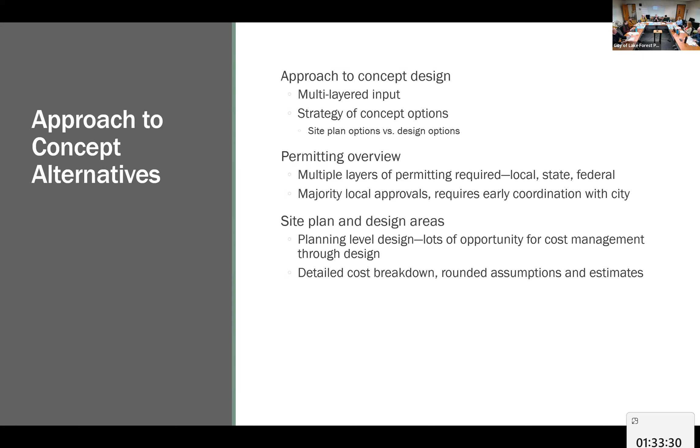So these are conservative costs. Just so you know, when you see them in there, don't think that that's what it necessarily will cost, but this is important information for us to make it to the next step.

Okay, so how do we price public projects? I have been to lots of public meetings where someone says, I built my dock for 20 grand over the course of a weekend. That might be true, but it's a different type of construction, a different process. I don't know if they got permits. They may not have.

And so when we talk about public place construction like this, a good way to look at it is relative to what else is around us. When we started this project, the council pointed out the recently constructed projects in Kenmore, Log Boom, and Tl'awh-ah-dees Park as being great assets for the community in our area. These are wonderful inspiration examples of what we would like to achieve in terms of the outcome of this project.

So we have kind of put those as brackets in terms of where our costs might come in as well. Obviously we have differences in area, differences in program. The amount of mitigation was a big driver in cost at Tl'awh-ah-dees Park - there's a huge amount of restoration, land forming, and earth moving that they did that really drove that cost. Then there's things like structures, bathrooms, utilities, all of those types of things that are different.

But what we tried to do is provide a breakdown of some recent projects. Those are all escalated to 2026, which is when we assume this project will go out to pricing. So today's dollars is one thing; when we put it out to a contractor to bid it, it will be future year.

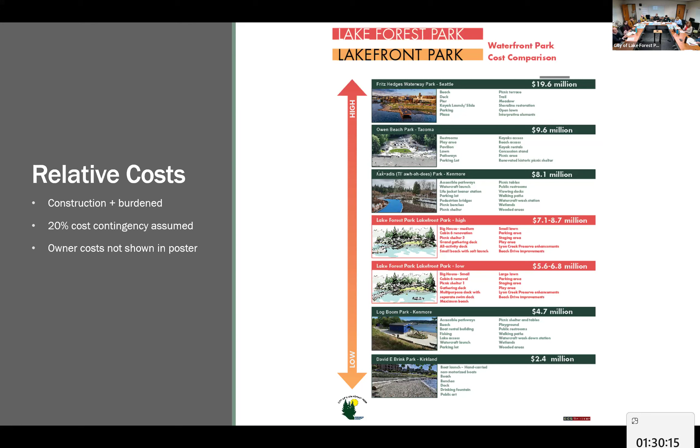Okay, got it. It is numbered page 7 in the cost packet, and it is page 40 in the PDF. Thank you, John.

I skimmed through the packet before, and I don't remember this, but maybe it's there. Is there something about what costs might be deferred? Like phasing, necessarily, where we're not going to do this now but we'll get to it later?

Yeah, so phasing the project is definitely a tool we can use to mitigate costs and divide cost over time. There are smart ways to phase, and there are ways that will actually increase the cost over time but allow you to do it in affordable chunks. So phasing is something we will explore when we get to preferred design, in terms of how these things can work together.

What could we do to build the park in a cost-effective way? The structure improvements may be one example—we could lock the structure and open it in year 3. Is that something that makes sense? Could we finish the park and then build the dock in year 5? If we did that, it would mean closing the park while that work happens, tearing up work we already did, or coming in by barge, which is a big cost increase. So there are definitely phasing paths we would look at.

Permitting, yes, and there are those types of things as well. So that's something we'll look at when moving into preferred design—how we can phase those things. Some of that phasing could also just be decisions that get postponed, or funding that we receive. If we receive 70% of the funding, what's the most efficient way to get as much work done, and then continue putting in smart, savvy funding applications for the next 30%?

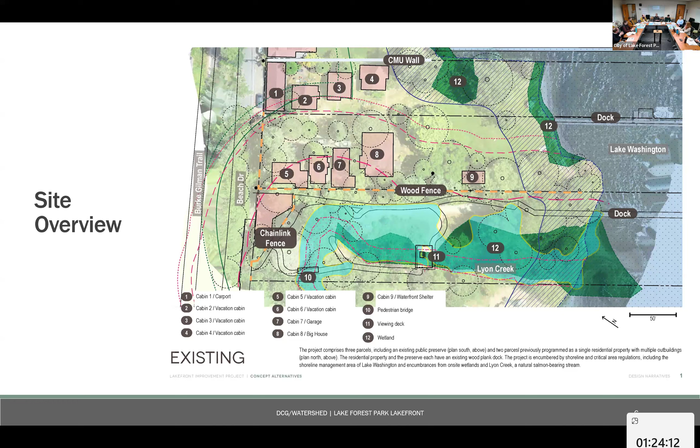So when we talk about mitigation, sometimes it really is for every square foot of development impact within any of these encumbered areas, we need to identify an equivalent square foot of restoration we can do. There's a chunk on page 6 of the packet if you need to reference that later.

So, planned demolition. Demolition and site preparation is a key part of this project. Some of that is because the funding we have, from the first series of RCO grants that the city got to purchase the property, necessitates that structures 1 through 4 be taken down. So those need to be demolished anyway.

There are 2 docks: the northern dock, which needs to be demolished, and the lower dock. Currently the dock on the preserve property crosses over a wetland associated with the mouth of Lyon Creek. It doesn't allow for water access because that's a specific prohibition of the conditions on the Lyon Creek property, and it's very close to the mouth of the creek itself.

So if we want to provide a dock that the community asked for, that people can recreate on, we'd basically be placing it close to the preserve dock, and then we'd have two docks, but that's twice as much maintenance and operational cost. We're starting to see issues with that dock too, in terms of tree encroachment and buckling of the boards, so it's going to need maintenance sooner than a new facility would.

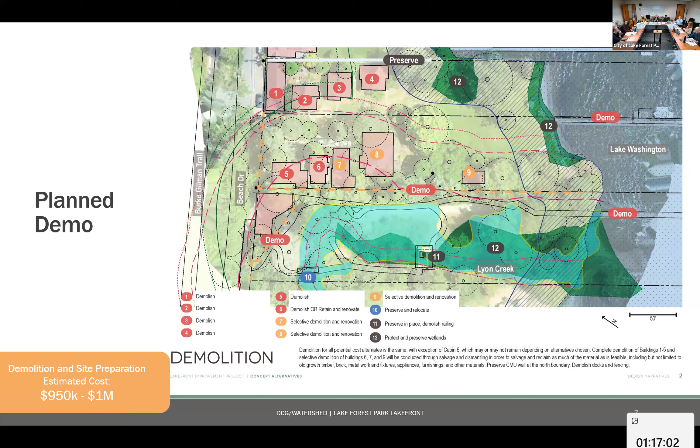Looking at providing a parking area, if we provide a loop that allows us to bring in school buses, allows emergency vehicles to turn around, allows for fire access, adding additional parking spaces means that we cannot keep cabin 6. So we can go with a smaller parking area and keep cabin 6, or go with a larger parking area and not keep cabin 6. That's one of those things we can iterate on.

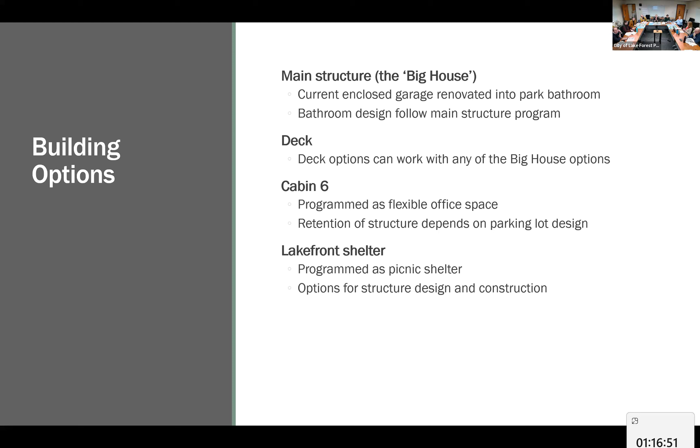And then the lakefront shelter, programmed as a picnic shelter, and we have some structure design options related to that one.

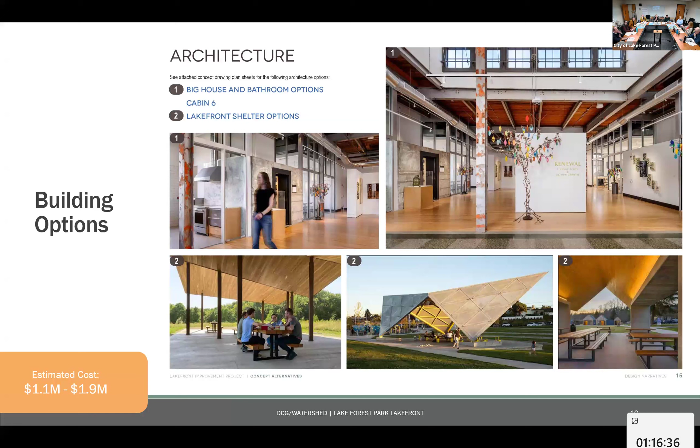For our building options, based on our cost pricing, we're in the $1 million to $2 million range, and that's for all of those things together: cabin 6, big house options, and structure options.

In terms of options for the big house, there's a small, medium, and large, and I've highlighted the areas where they change. Jack, do you want to present these? Sure. The small option is small in two ways.

You can see at the bottom of the sheet, what was the garage is now proposed as the public restroom - a 2-toilet, 2-stall restroom with 2 sinks. That's the smallest option for that.

The big house, the larger footprint up to the right, remains relatively un-demoed. There's a little utility room to the left with a door in it - we're keeping that in this instance. In the other two options it goes away, since it's not part of the original structure, not very usable, and makes the entrance narrow and a bit sad. So in the other two options we're removing it.

In this one, we're keeping it. The kitchen itself stays in the same general location as where it exists today - we'd put a new kitchen in, but essentially in the same area. We're also keeping a little bit of existing structure at the bottom of the kitchen, across the building to the other wall, in order to make spans smaller and hide new structure within those main walls. In the other options, that goes away.

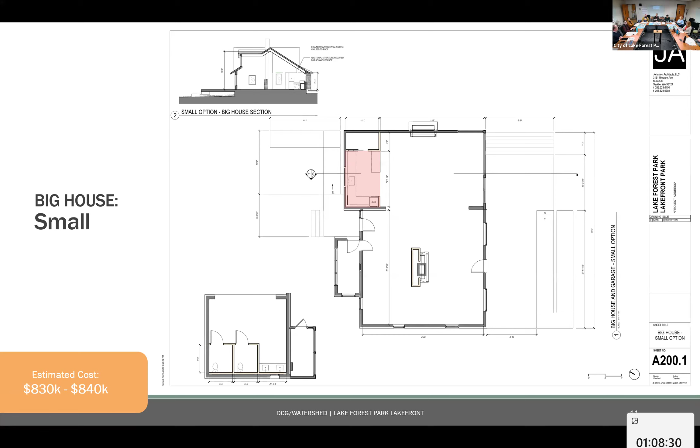I'm assuming it's the same brick that's on the face, because it does appear that way when you get a glimpse of it coming out of the roof. But currently we don't know that for sure. That's my guess. I'm going to skip us forward in the interest of time.

So the medium program, do you want to go? I can do it really quick. Awesome. So it's pretty much the same as the last one. I'll go through what's different.

We've changed the kitchen to the top to make it more of a single run. It gives more space to program, so it's still very usable, but gives more space to program. We put a little pantry back down to the south, to the bottom of the page.

And we do include in this version an accessible restroom within the house, so you don't have to leave the house to get to a restroom, which I think is really great for convenience and for accessibility.

Down where the garage was and where we're adding public restrooms, you can see that we've added 2 more toilets. So the 4 toilets is the max capacity you would be required to provide if we had an assembly use in the big house. So we're showing that as an option in the medium and the large option.

Outside of that, this is a nuance, but we'll talk about it a little bit in the cost estimate. We did a large roof, the dashed outline that leader is pointing to, so that you're covered going from the house to the restroom. What we didn't understand was that was actually pretty expensive, so the medium option is actually slightly more expensive than the large option, by about $12,000. There's a little bit more square footage of that roof in this option, which ended up negating the savings we were making on the interior.

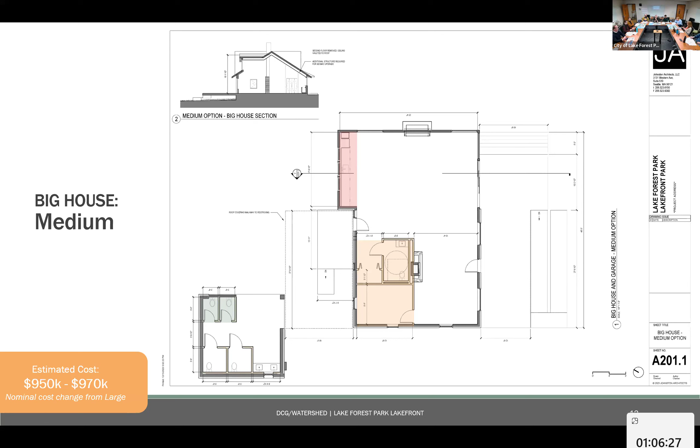And of the large assumption, understanding that we have a percent contingency of 20%, we're within that margin. So it is essentially a nominal cost change between the medium and large options based on that roof option.

So the decks are in separate slides, we'll go to the large house now. And just so all of you know, do all of these take down part of the garage structure?

Yes, so the garage is like a Franken structure. It's got the back, which is the old brick, and that's where some of the plumbing is, and then it's got the new wood garage front to it. So when you think about walking up to the center of the park, you've got the garage that kind of covers the beginning of the house. If we took that front part off and took it back to the brick part of the structure, it opens up that front where you start to see the front of the park, or the front of the house, as part of the entry visual of the park. So that's the intent here, a partial demo of the garage.

And would there still be slab? I'm wondering if there's usable space that can be turned into something, even if it's outdoor space.

Yes, so on your game board here, we basically have these two options that show the area where the big house can be programmed in any of those ways. You can see that the garage structure is pulled back, and we've essentially used that area to make an entry plaza for the park. So it all becomes one part of a sequence.

Okay, all right, and we can go to large just really quick, I can get through it very fast. The only thing that's really changed here, public restrooms are pretty much the same.

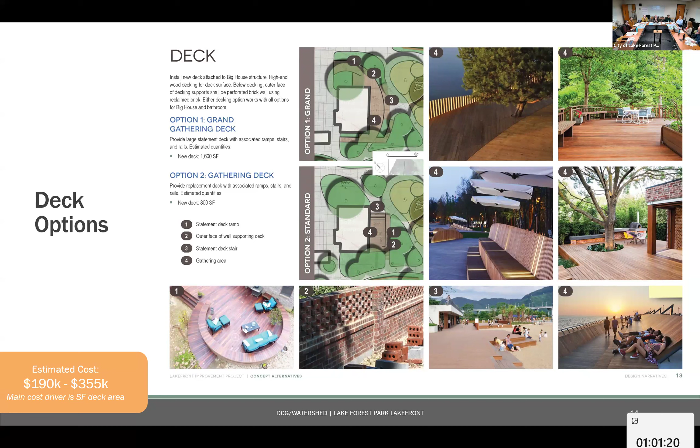So lots of options for things like, oop, that's wrong. Okay.

So we've got our deck with the grand program. This is looking at the deck area. We've got ramps. We are not through our grading exercises for this park, so these ramps may change, the incline might change. The stairs we imagine as a grand stair, but it does provide a sense of the difference we're talking about in size. You can see that comparative area to the house. This is nearly as large as the floor plan.

One thing a deck does for us also is help with stormwater drainage for this park. Stormwater engineering and drainage will have to treat everything, capture everything, all of that sort of stuff. Lyon Creek is a stormwater receiving body, and we are allowed to take our stormwater and drain it directly into the creek. But the ethos of this park and what we've heard from everyone is that they don't want that, that's not what the community seems like they would be jazzed about us doing.

So what we would propose is let's do better than what's expected in the regulation when it comes to stormwater. Capture what we can, treat what we can, and do that before ultimately cleaner water runs into the creek. One of the ways we can do that is through vaults, which are very expensive. They're either above ground and you're looking at them, or they're below ground and twice as expensive.

One thing the deck does for us is it allows us to have the visual of buried treatment without it actually being underground. It would just be under the deck structure. So this location would likely take the roof runoff from the structure, hold it in a little tank, settle it a bit, and then we'd look at dispersing cleaner water. It would be part of a larger stormwater program. It wouldn't solve all our problems, but it's one of those things the deck can help us do.

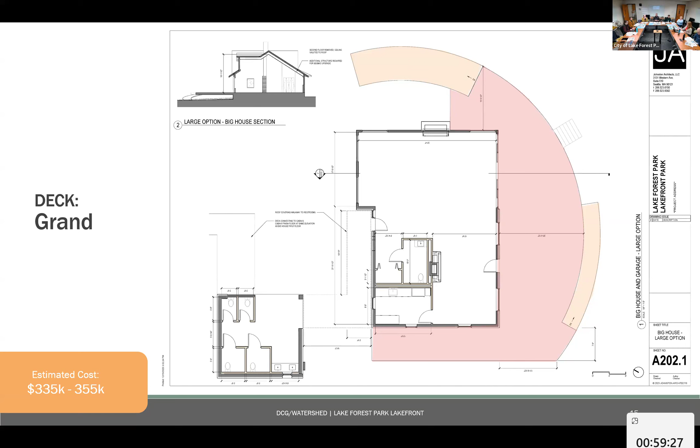So the modest deck program is much smaller, much more similar to the deck that is there currently, and it would of course have a ramp that would allow it to be accessible. So for cabin 6, essentially we looked at those options.

For the demo, what if we put parking? We can't keep cabin 6 in both of those scenarios. So these are your parking lot tiles - these are your two options here that show cabin 6 going.

In terms of what it makes sense to program cabin 6 as, opening it up as office space would provide another flexible, unprogrammed space that the city could choose to operate as they wanted. It could be overflow office space. A suggestion that came out was having maybe a community policing office there, so just providing a space that would not necessarily be open to the public.

Artisan residence was mentioned by the community members. It would be a flexible space that would add to that programming and community-based programming for the park, and it would really be a keep-it-or-don't-keep-it type of program. So there's basically one option for cabin 6, and it's it stays or it goes. If it stays, we wouldn't be able to do the maximum parking scenario.

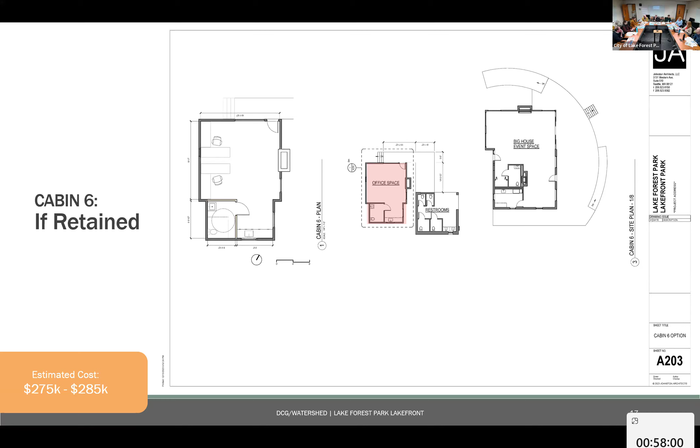So the lakefront shelter - again, we heard picnic pavilion. What we have here are a couple different design options that show some different examples, and then we have some costs of what cost implications a more complicated design has versus a more simple design. One thing to note about these is the footprint - we do have about the same footprint.

So here's the existing plan - about the same footprint, or a smaller footprint. And in this case, that reduction in area is one of the cost drivers, but this would also provide another option or opportunity for mitigation, to say we've given back 20 feet of this structure. So one thing to think about.

Jack, did you want to make any mention of these things? The only thing I would say is please don't get hung up on the aesthetics. I think if we chose the simple one, we could still do a folded roof, or we could add a wall or a chimney or something like that to the simple version. It's not necessarily the architecture driving those costs, it's more the size and what's inside of them.

Inside, in what way? Inside meaning, is there a wall, is there a chimney? I think we provided electrical outlets for pumping up your portable watercraft. I don't remember if we did anything for kayak storage in these - no, that's the other spot. Okay. The sink, outdoor shower - associated with these, so there's bits of program pieces that are also associated with these.

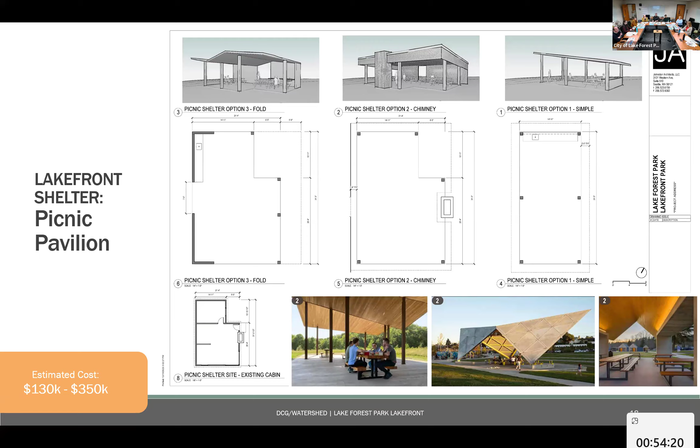Okay, so now we're going to hop into the design areas with single site plan concepts. So we've got the city hall to the Burke Gilman Trail. When we started this project, we knew there was an interest in providing parking in the city hall parking lot and safe pedestrian connections between city hall and here, which is where the current Lyon Creek Preserve parking spaces are. So we looked at that condition and provided recommendations to the city.

We heard a lot from the residents on Beach Drive. We heard a lot from the community about where they felt safe in the approach to the park. You remember the exercise with the dots. There are improvements to be made.

And we can either decide that those are project costs, in which case we would be on the timeline of the Sound Transit projects and WSDOT. So that means that if we're saying whatever they do with Sound Transit, we're going to come in and redo this intersection, we're talking many, many millions of dollars and a very long process to get that happening.

So the decision was made that the design team, led by Jeff and Kirk's team, provided recommendations on what could be done to reestablish the U-turn at the intersection, which would keep people from U-turning onto Beach Drive, to maybe widen the crosswalk, to widen the path approach. We also worked on what the future of that area adjacent to City Hall, where the designated turn lanes are, is going to look like according to the Sound Transit plans, and how we would iterate on that. So how can we say, hey, you're going this far, why don't we just do this other thing, and have that be part of it?

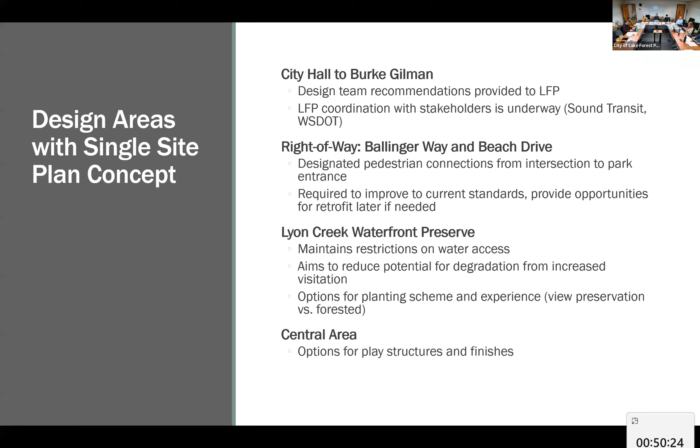And then the last is the central area. This is the area that connects everything, kind of between everything. There's options for play structures, finishes, that sort of thing that we can discuss when we get to that.

Just a time check, we're at 8:10. Okay, perfect, a little timer ticking away there at the bottom. 50 minutes left of this meeting.

Okay, so here's the recommendations that we provided to the city. Jeff, do you want to give a 30-second, 2-minute, or do you want me to go over them and then you can be expert question answer? No, you could go for it, Amber. Okay, that sounds great. All right, oh, two Jeffs, okay.

So essentially, we've got the journey to the park, starting with our front door to the park experience, starting with those existing spaces for the preserve, so the dedicated few that are there. Currently it's a pretty narrow sidewalk, and it basically puts you out in this area, kind of coming on at the side of that lane.

With the reconfiguration, the addition of the stop, the proposed plans, not the final plans for Sound Transit, but the improvements they're making, that becomes a narrow sidewalk that doesn't line up with the program. So the recommendation we made was to widen that into a path, a 10-foot wide path that leaves the parking area and comes down a little closer to the corner where the new curb ramp will be, so it's a nice wide crossing across that lane, again a wider path.

So if you're imagining a group, a family, pool equipment, that sort of stuff coming across this way, we wanted to provide as much refuge space here as was feasible, while still keeping the tree and those types of things, and still working within the proposed plan that Sound Transit is committed to making in terms of their improvements, based on them being not completely done.

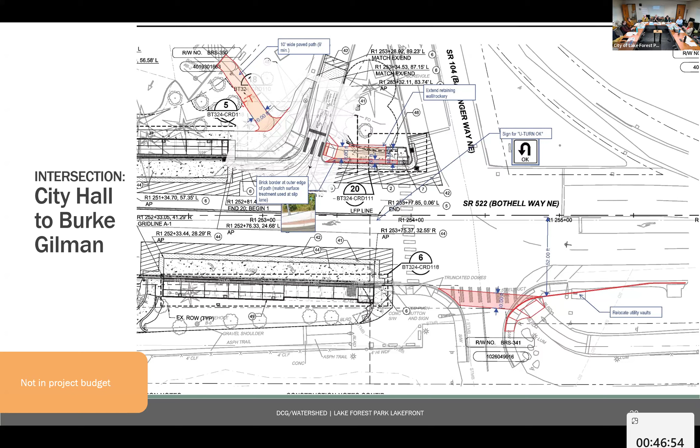So it's something that, again, not in the project budget, moving on its own course, coordination between Sound Transit—and this is actually in and adjacent to the King County right of way. So there's a handful of other interests looking at this, but it is moving ahead, though it won't be represented in the project cost or the presentation to the community, essentially.

Okay, so the right of way, the safety and code compliance, that's what we need to accomplish here. Our project in terms of cost really starts at where the sidewalk and curb ramp for the Burke Gilman are. We would propose a new sidewalk to extend down to Beach Drive, a striped crossing to keep people there instead of feeding across the intersection like they do currently, and then within the right of way, a length of sidewalk all the way down to the park entrance.

Our goal here would be sidewalk to the park entrance. There is a chance that we might be required by the city code to bring it across the whole frontage, and then it would essentially just pour out onto Beach Drive because it doesn't connect to anything. So we are very sensitive to the impacts of this project on the adjacent owner.

So there's a handful of things that we're trying to orchestrate here, like Kenny said, to make sure that we are doing the best that we can to make this a reasonable project to go into a residential zone. Estimated cost for sidewalk improvements to the right of way, we're looking at between 140 and 150.

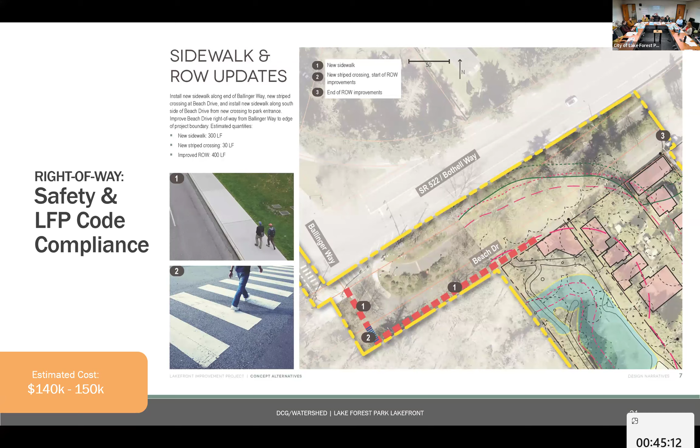All right, so the preserve area. This is our single site plan option, the one on the base map here for your plan. What we are proposing in this area is to retreat off of the south bank.

If you've been out there recently and you look across, you can see where the creek has widened a little bit, and it's actually starting to undermine the fence on the Civic Club property, just past where the trail ends. We also know from the flood capacity work that happened, increasing floodplain to the park, that we do have flooding. It's a dynamic system, it floods, it overtops, it actually closes some of the path when it's really flooded. It's designed to do that.

So what we've provided is basically reconfiguring to create multiple experiences, like sitting at the end of the dock in a quiet space. Retreating from that south bank lets us call all of that restoration mitigation for the work that happens to the north. Coming off of the south bank, which is already starting to be stressed and undermined at that property line with the Civic Club, gives it some space, and provides a buffer to the Civic Club, since we know that with use of the preserve there have been some trespass issues onto the Civic Club property. So we're trying to do the best thing by saying, this is a preserve, this is the park, and really directing people to use it in that way.

What you'll notice in this image is that this bridge that's currently there is not there. What we're proposing to do is actually take that bridge and relocate it, use it with the existing deck that is there, and reface the deck. We would keep the opening because I think it's actually quite fun, but then we would propose a new railing that's contiguous from one feature to the next. So you'd imagine that when this flooded, the creek would swell, it would flood under this bridge, it would flood around this platform, and so it wouldn't ever result in a seasonal closure of the park infrastructure.

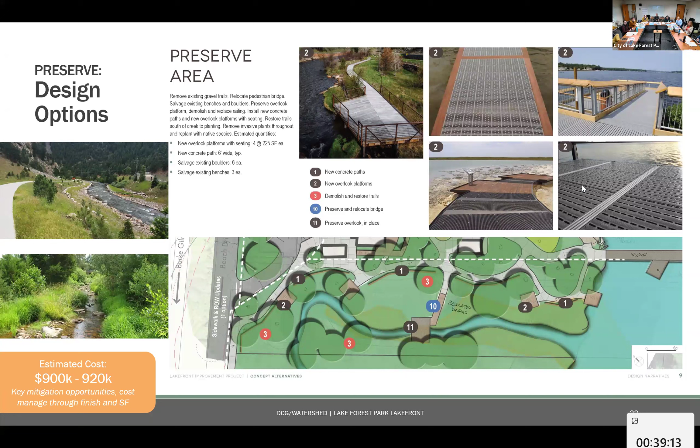And invasive removal, I assume, could also be a volunteer project. Could be, yes, there's a lot of expertise and interest. Right, and if we can mobilize some of that, there are times when you can count that as an in-kind donation to support a grant. So if matching funds are required, we can demonstrate and document that, which isn't a light lift for some of it. But if we can say it's 100 volunteer hours, that can be an in-kind match to help us secure other funding. So there are mechanisms like that we can use. The best thing we can do is price it well and ask for enough money. But that's a great strategy once we find out what some of those awards are, as those decisions are made.

Okay, so the central area, this is the area that basically joins the parking lot all the way out to the dock. If you look at the virtual site tour online, or remember being in the park, there are those two large trees with the very thick bamboo beds underneath them. The view from the structure at this point looks through that canopy straight out to the lake. It's a really nice visual. Now, all of that bamboo would need to go. It represents an ongoing maintenance issue, but keeping the trees to frame that view would be quite nice.

Thinking about how people will recreate at this park, and people asking for a play structure, we thought that the space under the shade of those two existing mature trees would be a really nice way to program a nature-based play experience, without getting into the soil and root zones of those trees that would jeopardize them staying.

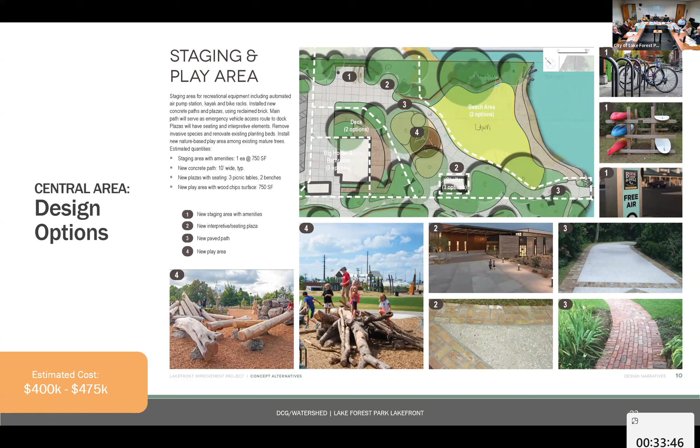Some of the ideas here were reusing brick from elsewhere on the site, incorporating it into the creation of this central area and plaza. So lots of design decisions, lots of opportunity for cost management, but really one site program option that brings everything together.

Okay, so the site plan options: parking and entrance, beach area, and the dock. These are the ones represented by tiles here on the map.

For parking and entrance, we provide a more and a minimum scenario, assuming the majority of parking will be at City Hall. There are operational limitations that could be imposed on parking - spaces could be signed as permit only, load and unload only, or 90-minute max. That's an operational decision. The cost and construction would be for the parking spaces. So there are decisions to be made in how this park will be managed that go beyond the design work we'd be doing now.

For the beach area, as Kenny mentioned, there are some SMP concerns. One thing you'll see that's not really visible here is we're proposing a buoy line - a swimming area delineation on that north property. We don't want to draw people into an attractive nuisance, or onto the neighbor's property, even though their dock is really nice. Making sure we have a clear delineation of park area versus non-park area would be important to the park's success.

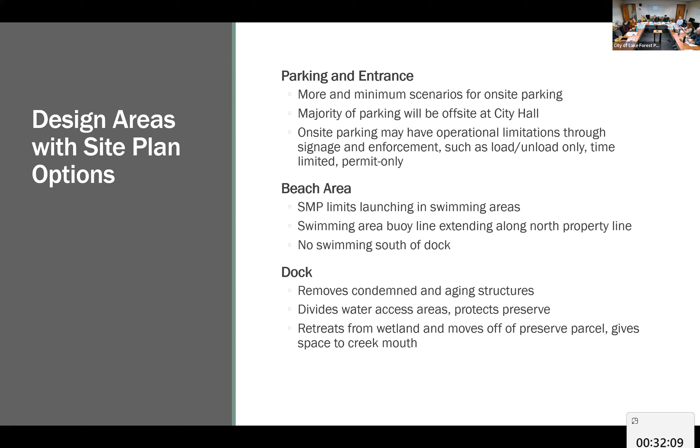We would assume no swimming south of the dock, where the preserve is located. So we'd propose something like a railing or delineation on the south side of the dock. The dock also removes the condemned and aging structures, and divides the water area. Importantly, it retreats from the wetland where the current one is located, and moves the dock off of the preserve parcel.

Okay, so here are the two options for parking - those tiles there. You guys are welcome to turn this.

We have what we call the more parking and the minimum parking option. For the minimum parking requirement, based on decisions made from the structure, we'll be required to have somewhere between 3 and 5 accessible spaces. We would also provide something like a service bay, which you can see on the north side of this picture, and a load zone - or it could just be for fire or park maintenance vehicles, where no one else is supposed to park.

This orientation does allow us to keep cabin 6. So cabin 6 - yes, no - and then we have a minimum parking option.

This is the more parking option. It's not meant to represent the most parking we could fit at the park. When we had the community workshop, we put out lots of parking space tiles and nobody used all of them - some used just a couple, a lot used right around 5 to 8. So people understand that the more parking we provide, the less park we have. This could mean it's made a little smaller, but this is really the most that we can reasonably fit on the site, provides a workable entrance, is cost reasonable, and doesn't compromise our ability to provide the other things in the park.

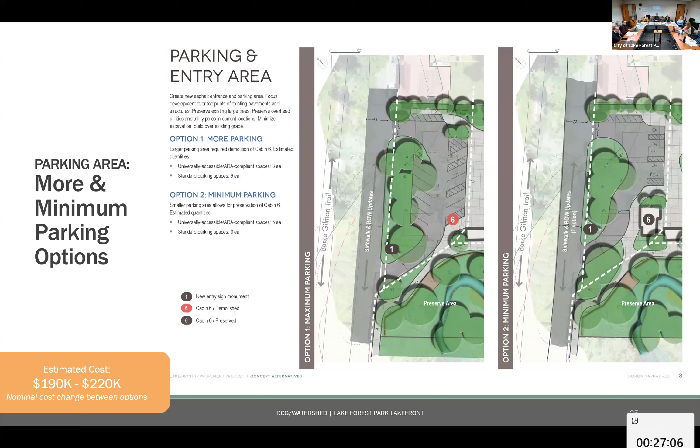There would be cost implications to not keeping cabin 6 - we're looking at a reno cost of about $250,000, something like that. So that's money back in the budget if we go with slightly smaller parking. Now, what we noticed is the difference between these two parking areas as shown is not great - it's more paving in one, and in the other it's more pedestrian plaza, which is actually more expensive than asphalt paving. It's also more landscaping, so it's not just a parking cost reduction - you have to fill that space with other things. Based on how it's currently programmed, the cost change is not huge.

So the beach area - one of the really wonderful things about relocating that Turner structure, the Turner property dock, is that it allows the beach to be one contiguous space. So you get this nice wide beach that feels twice as wide as it currently is.

We would not necessarily be able to put in a big lawn like that - it's looked at as an impact. So the fact that it's already there, what we would basically do is fence it off and say this is a no-touch zone - you can't put equipment here, you can't stockpile here, you can't track over it. It stays as it is. That allows us to keep as much of it as possible, is what we would argue for. There's some risk there, but we think we can make a good case.

As Kenny mentioned, there's some language in the SMP about waterfronts that says swimming areas will be separate from boat launch areas, but it doesn't define a boat, and it doesn't define separated by how. So what we have here is basically as much beach as we can get, retaining as much lawn as we can get, and moving the dock to its location, basically assuming that boat launching, whatever that is, will happen at the end of the dock.

If we want to provide a designated soft launch - if you look at beaches like Lake Sammamish State Park, some of these where you've got combined activities, one area sort of becomes just a line of kayaks all the way down it. So by providing an area that basically says, if you're going to launch a kayak, it's over here, that does allow us to contain that use to an area, but it obviously somewhat decreases the size of the beach. So here's two options for that beach area of how it might look.

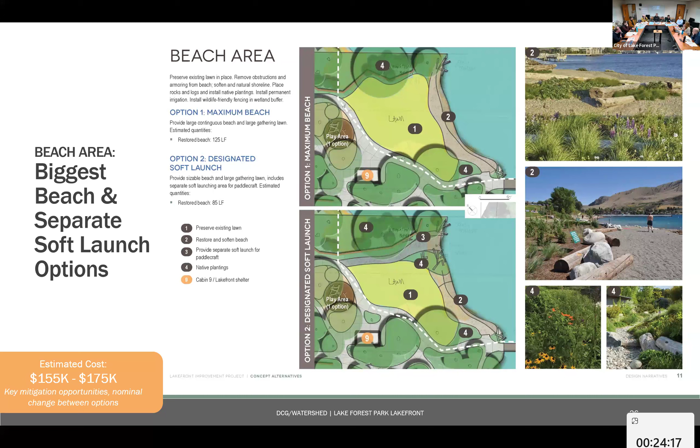I'm just trying to visualize the kayak launch scenario in comparing it to Lagoon. There are two ways to launch your kayak: straight off the beach, or they would place a floating platform by the pier.

Is that something that will also be featured at Live Beach? We looked at that accessible launch, thinking about how the lake works in this area. It's very shallow when we're at the beach. Being able to provide an accessible launch with a floating gangway allows you to station a kayak, get into it, and then push off into the water.

You need water to be able to do that, so it meant pushing it out farther towards the end of the dock. It also gives us separation of boat launching and swimming, because swimming is at the beach and boat launching is at the end of the dock. So it's that gray area of what constitutes separation, and what constitutes boat launching. Does it also mean bulky boats are moving along that dock?

Now, what is a stand-up paddleboard? Is that a boat? Probably not, maybe. So would we still anticipate people launching stand-up paddleboards from the beach? Probably, and it would probably be fine for us to anticipate that use, depending on how the code is interpreted.

That sounds like you're talking about just the beach scenario, where people just start organically launching, like a surfboard or stand-up paddleboard. So is that a boat? I would think no, but I am not making the decisions.

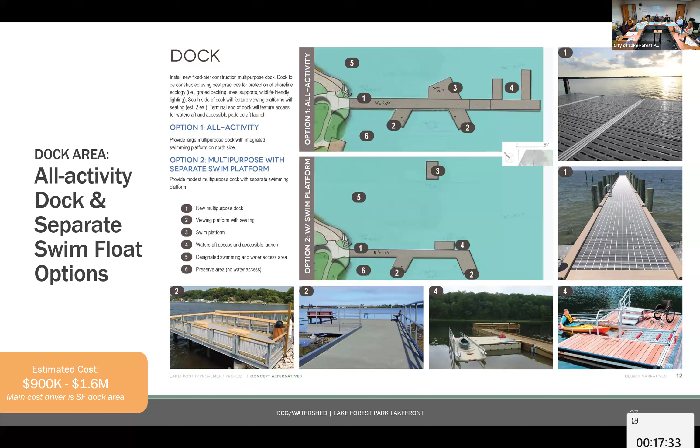Okay, so keep skipping along. Some of the additional design items people have mentioned - utilities and stormwater.

And then if you can keep something, it surprises you with money back in the bank, but price it out as if everything is being redone. So you'll see that the utilities cost - that's what the assumption is.

Placemaking details, and then two example concepts that I'll share with you. If those are not the concepts, they're just examples - that's what your activity is for. It's for you guys to build the park example that feels right. You can also take these pics home if you want, but we would love to see what direction you're leaning in, so we'll photograph them at the end of this meeting, which is 16 minutes from now, unfortunately.

Okay, so stormwater. This is obviously not a stormwater construction plan - this is a stormwater diagram with some initial thoughts so that we could get it priced.

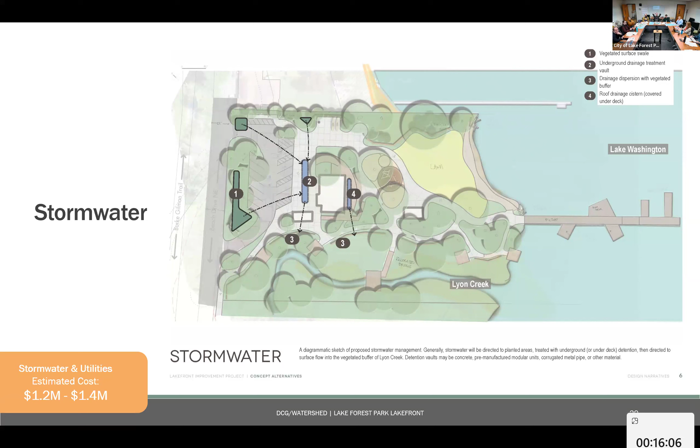So the combined stormwater and utilities cost based on this thinking is between $1.2 and $1.4 million. Utilities, we're assuming landscape lighting where it's necessary, and water, sewer, electric at each of the structures. Cabin 6 is grayed out because we're 50-50 on cabin 6, to power that pump station, those types of things. A hydrant is likely, and then we may be required to put a fire main on the dock.

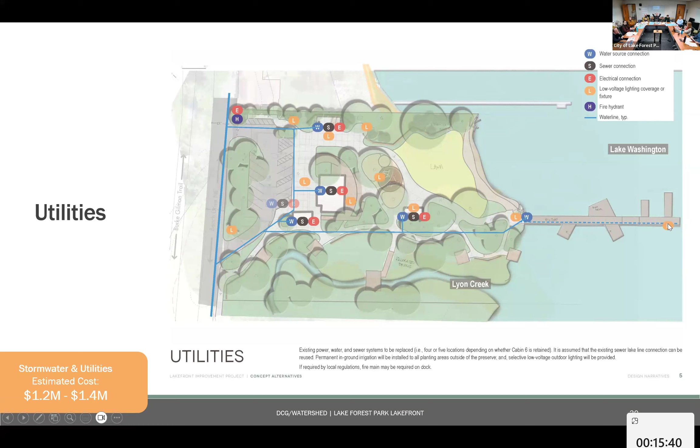Not sure, that's a permitting question.

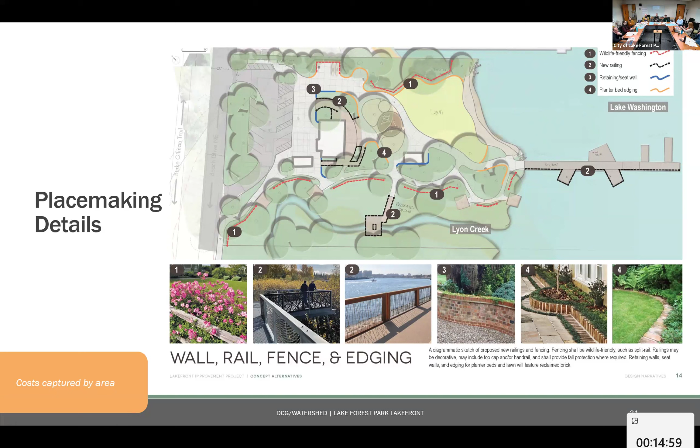Placemaking details like railing and fences are priced into the individual areas. Path edging is captured in the beach area cost, and railing along the south side of the dock is captured in the dock cost. There are many ways to use patterning and design to create the vision for the park, looking at what's going to stay, the structure, the big trees, the spirit of the place, and how we bring that thinking out to the other elements, like the renovated railing on the relocated bridge and the viewing platform, so it feels like one continuous park.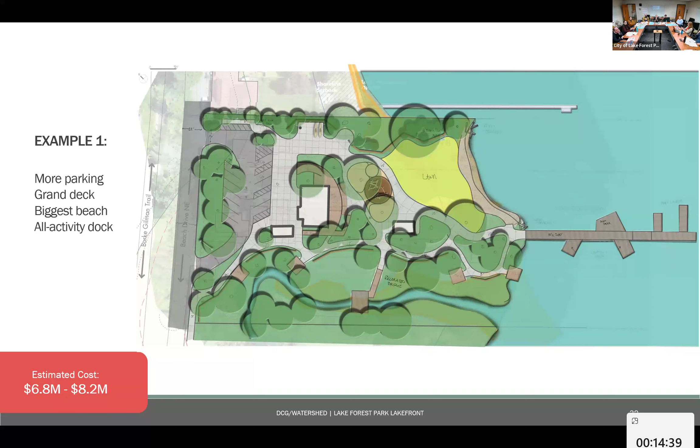Here's an example. If we put the plan together this way, we're in that 6.8 to 8.2 range. This includes more parking, the grand deck off the house, the biggest beach we can get, and the all-activity dock, at a concept level estimate.

Example 2 has the minimum parking scenario, the modest deck, separate soft launch, and the smaller dock, so kind of pared down, but keeping cabin 6. It's not the lowest we could go, because we've got cabin 6 in there. We're at 5.8 to 7 million.

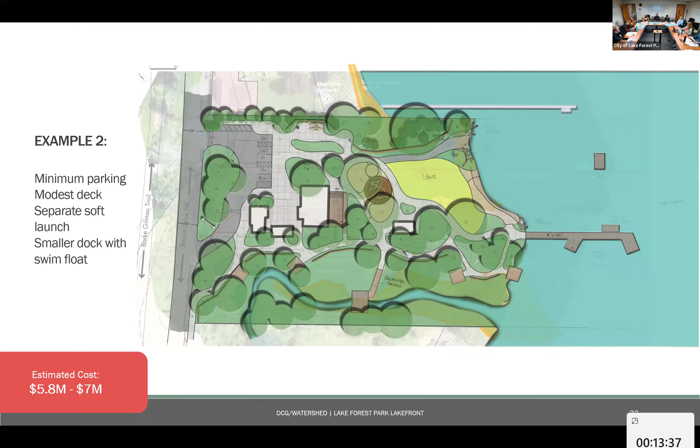Here's some visuals of approaching the park. Walking down Beach Drive, we've got the chain link fence of the Civic Club on the right-hand side. The Civic Club property ends at that end fence post. We've got an open view that unites both the front of the preserve with the front entrance.

If you tell us you don't want one of these options, we have to redo all these renderings, so that's why they're kept to a sketchy point. Also, when we show the public fully finished photorealistic images, they think we've already made the decisions, and they don't give us as much input.

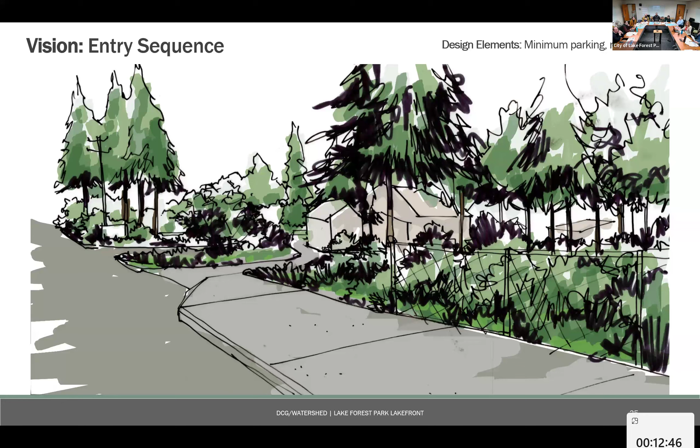This shows the option without cabin 6. That structure is the house with cabin 6. You can see this works for either parking option, they look the same. This one has to be minimum parking because it retains cabin 6. There's not a big visual difference because we have nice screening in the front of the property that keeps more parking from looking like a parking lot.

This is basically if you're walking down Beach Drive looking at what will be the entrance of the park. You can see the garage has been demoed halfway, leaving a much smaller structure, and this nice opening plaza view. This one retains cabin 6, while this one removes cabin 6 and has a slightly wider parking area.

Sorry, can you do that one more time before I move on? Sure.

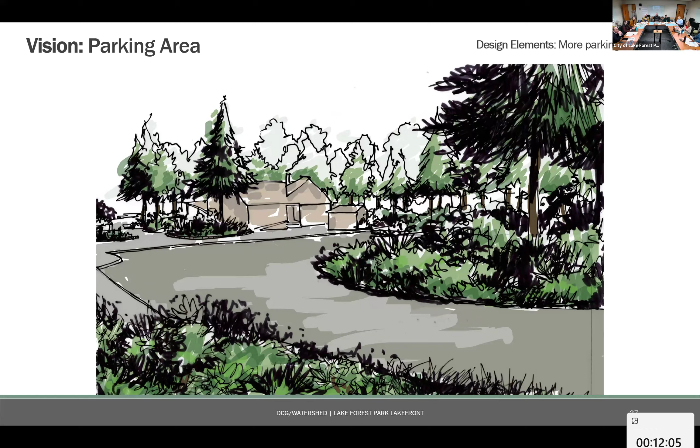Here we've got the entrance to the preserve. Imagine walking onto that sidewalk, coming down this little preserve path, and catching sight of that first little seating nook.

In the plan those nooks are about 15 by 15, big enough for a picnic table in case we want them there, and we can afford it since it's in the cost estimate. But if it's just a bench, it might be 8 by 4, reducing cost that way. We can mix them up, having two picnic tables near the shelter and the others bench-only, so there are opportunities for cost control.

Here's the preserve entrance, this one has no cabin 6. The structures you'll see on your left are the renovated bathroom, and behind that the house with cabin 6. You can see in the back roughly where that bridge would be located, and further back here, this is a representation of the simple structure.

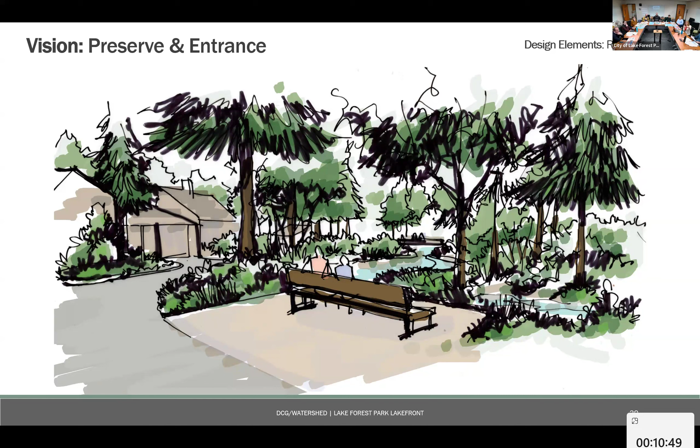So you would have that vision of walking down the sidewalk. Once you're on this path, the preserve opens up and you can see down the creek. Then coming around that path is where you'd start to see the reveal of the deck behind the house, and the reveal of the shelter down in the distance, with the view out to the water with each of these.

So this is a neat one. This is standing in that plaza with the modest deck, which has the minimum parking area where it retains cabin 6. Straight ahead is the bathroom building. That looks like a garage door, but it was meant to be just a wall with doors on either side. So right-hand side is cabin 6, left-hand side is the house.

And then this changes to that grand deck, where basically the entry sequence encourages you to walk up and catch that view, and then you can descend down into the center part of the park. Rather than having a plaza where you can get into the bathroom, the other structures are locked. And then that's the beginning of the ramp.

Did you say if there's a ramp, there is no cabin 6? No, so there's no correlation there. Either of the deck structures can work with any of the parking areas, any of the structures.

One thing about the program on the interior of the structure is that based on the square footage area, if we packed it full of as many people as the fire marshal would allow, we needed like 50 spaces, right? Was that Jen's math? Yeah. So we could basically say the fire marshal limits on this building, if we have the parking, allow 250 people. Or we could just say the capacity of this is 75 people, and then we have arguments for less parking.

We can just post occupancy, right? We can also assume shared parking across the street. So Jeff's team would be the one making the argument for how many people are going to park, that we have shared parking, and the cooperative agreements that would need to be in place for the city hall parking and all of that stuff.

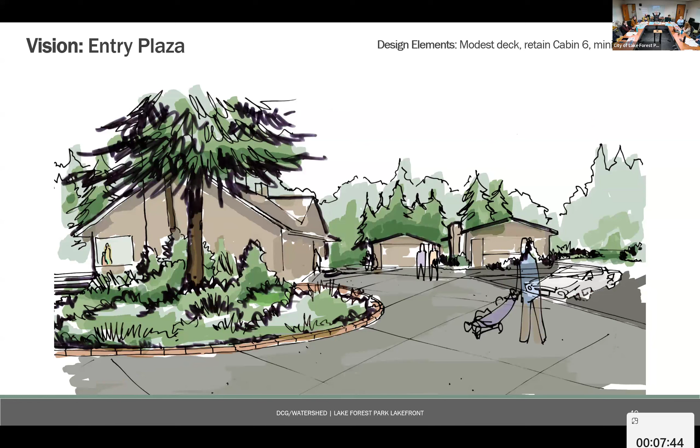So if you're at the swimming area and you're not renting the building, you would just need to have a bathroom—a swimming bathroom, right? Got it.

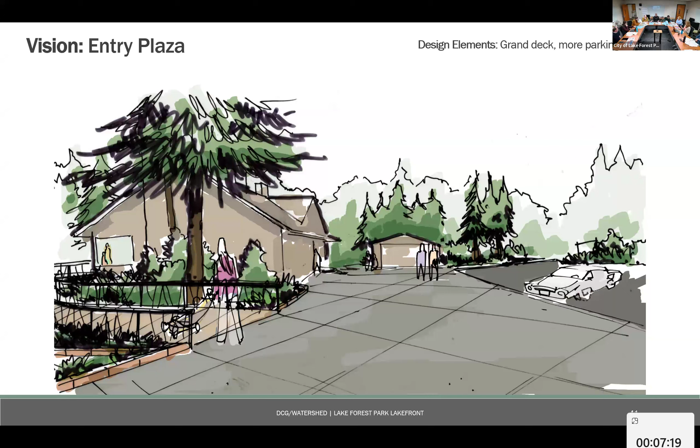And would there also be, I'm trying to remember, a path straight out to the—yes. So basically on your diagram, if you're looking for the parking area and the deck area, that's where those two things start to show: the grand deck versus the modest deck. So that's whether the ramp greets you or doesn't.

So you've got two parking area choices, two central area options. Okay, so here's the central area.

So this is basically us standing at what would be the end of the designated kayak launch and looking back, where you can see the play area in the center. This is a representation of the simple shelter, without a separate soft launch. The deck from this distance is going to look very similar regardless. This gives us a slightly bigger beach because we don't have the designated soft launch, so bigger beach and lawn. And we've got a representation of more like the chimney structure here, showing what that could look like.

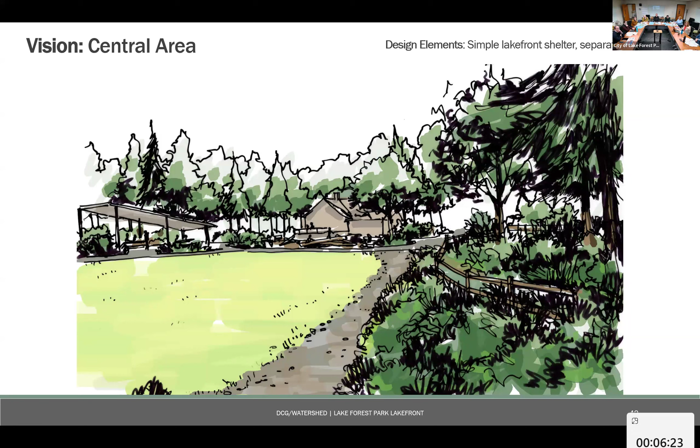So again, thinking about what it would look like to look into the center of the park, recreating on the lawn and looking back, and what that spatial relationship would be like.

Okay, so here's again standing in essentially the same spot, but casting your gaze down the beach and looking at the dock. So this is the modest dock, and this is the all activity dock.

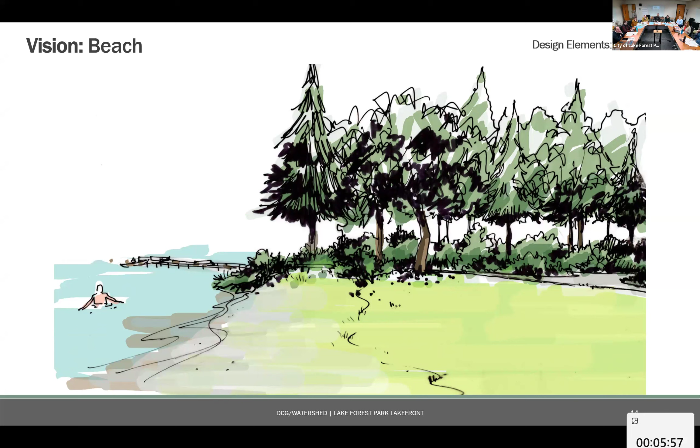And the swimming area—we should just call it the teenage hangout area. I have one question about that.

The depth of water, is it such... yeah, that's what I was going to ask. So long and shallow. Do we actually think it's feasible that anyone's going to swim except off the end of the dock? And how far out would that platform be?

So one thing we heard in the feedback was wading—people wanted to be able to wade in the water. And so we know that the beach itself provides space for wading. We also know that the big swimming time is summer, when on this lake the water's high, so we'd expect things could take place a little bit closer to shore.

But obviously this is an accreting beach. We did get bathymetry with the survey, where they actually go out and take stations and do the underwater contours all the way out past the end of the dock. So now we have more information on what a realistic length of that dock could be, and all of that will go into, maybe this integrated swim platform scoots down the dock by 10 feet. That might be something we do.

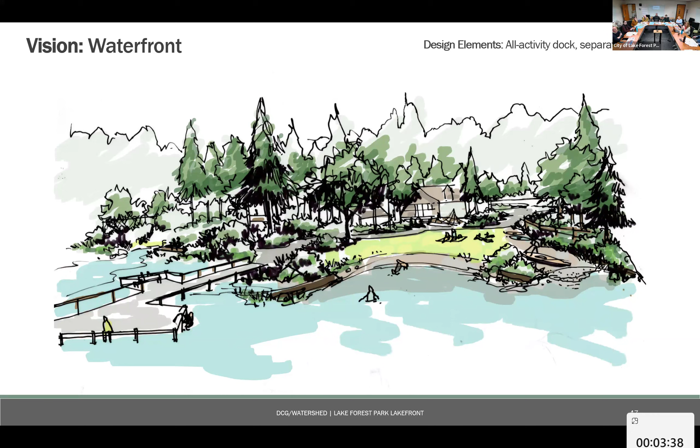And then here's basically looking—this is either dock, because they're both the same from this vantage looking back. And either beach, this would be the view you'd be seeing of that one emerging overlook located near the mouth of the creek, but roughly where the existing dock is, or further out.